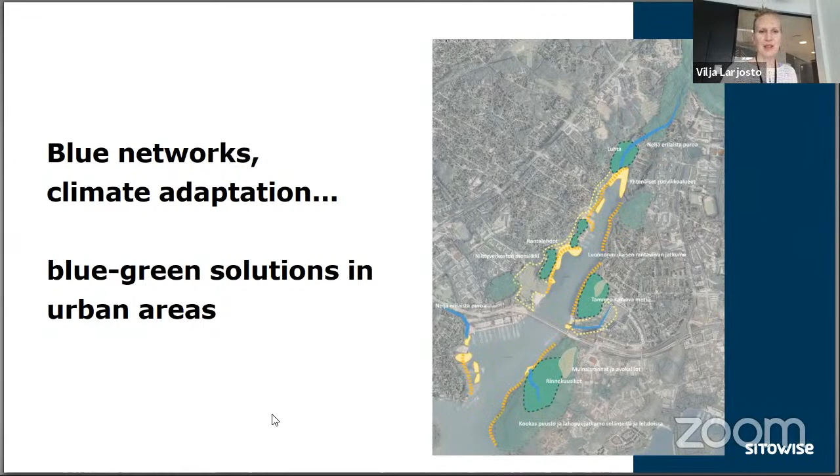In a number of projects that I've been working on in the 2 recent years in Finland, today I will talk about a river in Espoo, which is part of the Helsinki metropolitan region. You can see on the right-hand side, it's a river that flows in a very urban setting with habitation around it, as well as industrial areas.

And its mouth here, the delta so-called, it comes to a small marina area, and there is also a lot of reeds growing there.

And this is actually what is happening more and more. Very often the river flows here under this road and continues towards an industrial area and fields there.

But you see this almost yearly now that these flood events are happening and they are actually cutting the streets. Very common phenomenon for European cities, and I think Finland has been spared mostly from this kind of extreme events until now. But I've been working on 2 projects that are not yet concluded or constructed.

So I've been involved in the reconstruction of this street design here because we want to raise it a bit higher in order to avoid the flood events. But of course that doesn't actually solve anything for the floods, it just floods less frequently when it's higher.

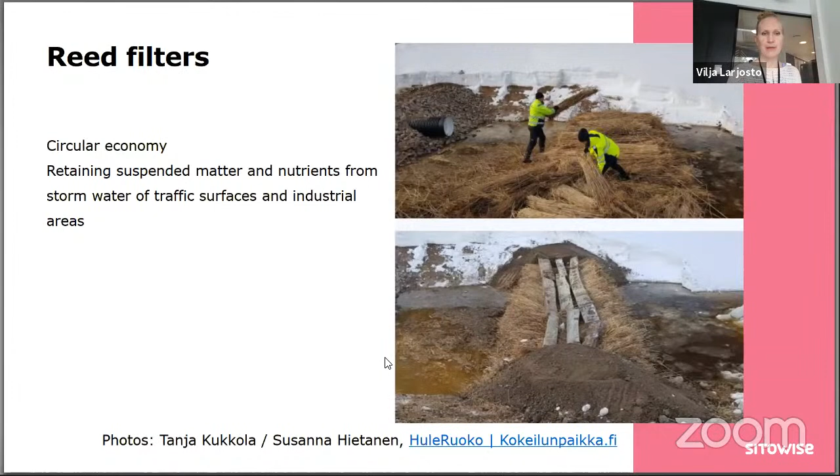I'm seeing a message in the chat. Is there? Okay, there's just Anna's message too. You can ask questions.

The third solution or approach we are using in this project is in connection with the road or street design. You can see the flooding street I showed here. There, the most important function for these bioswales is not to control the volume or quantity of water, but the quality of stormwater before it flows into the stream.

So what we are applying here is this idea of bioswales on both sides of the streets. The idea is to help absorb or filter nitrogen, dissolved metals, and phosphorus, so that it wouldn't go into the stream.

But at the same time, we wanted to take this further by introducing dynamic vegetation to these swales, because we're also working with the image of vegetation in the street, as opposed to traditional or business-as-usual urban streets where you have grass or lawn and some bushes and trees. Here we are working more with meadows, taller grass vegetation.

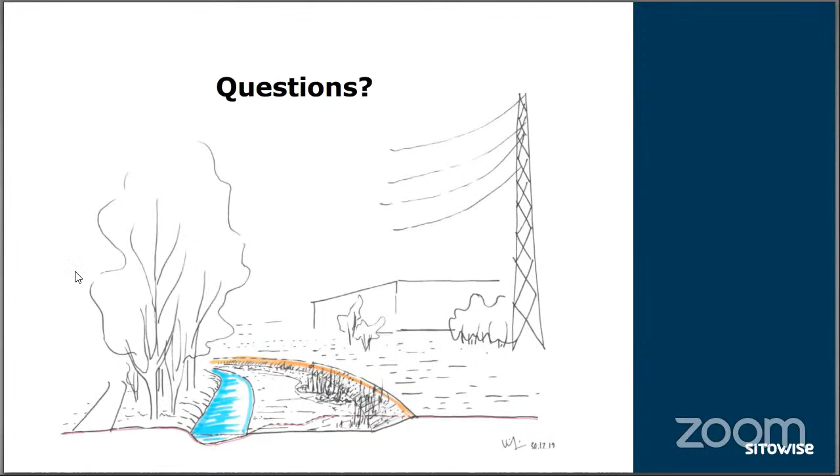There's a question here by Alex asking: can you name some examples of plants that are useful for bioswales in Finland?

I will go back to the slide with the plant pictures. I'm not the plant expert, and I have the planting list, but we don't know yet for sure if these are the suitable plants - we suppose that they are. We looked actually very much at natural plants, these kind of modest plants. These are the different plants, but I don't know their scientific names, so I don't know if it's helpful to start naming plants in Finnish, and each site has its own characteristics. But we tried to add species because our expert on dynamic vegetation also knows a lot about butterfly plants, etc. They knew how to pick a bit more rare species and native species for the selection, so we can not only find plants that survive there, but also support maintaining more rare native species if they are available and can be found.

Thank you, and there's another question - a few more actually, now I got them. How do you determine the positioning of the meadows, where it starts and where it ends? I guess the measurement is the key question here. Yeah, how do we measure?

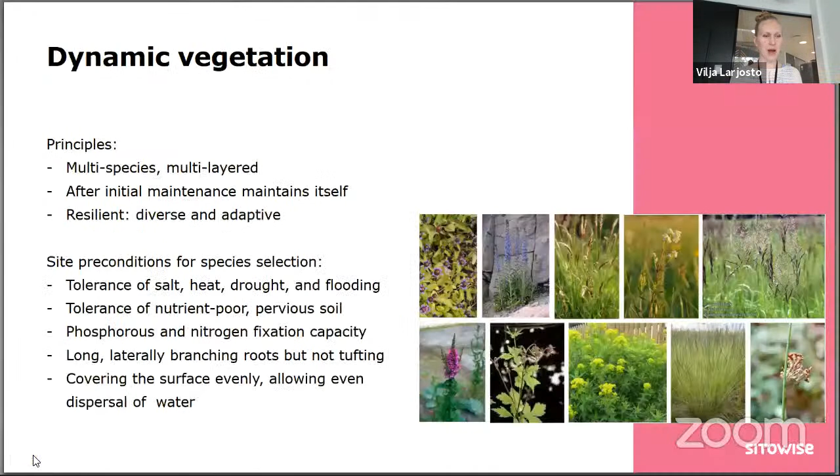I don't have our design map here, but if I understood the question correctly, I'm just skipping back to this slide. We have a map, the design site plan of the whole drawing, and these areas are actually quite well defined. We looked at the mean water levels and the high water level, so the size of the meadows comes from the hydraulic modeling, from the modeling of different flood frequencies - how much more or less volume and capacity we should need. Then together with the water experts, we made these shapes where the slopes are always about 1 to 3, because of maintenance - the maintenance is done by machines, and this is a recommendation.

So we have this slope, and then the adjacent surface shown here in this section, adjacent to the main water body, the main stream. But here, as I said, this other one is separate, but it also has the 1 to 3 slopes, and there's a certain size calculated for it. About the meadow: below the mean water level, we are not planting anything. Above the mean water level, we have direct sowing of a certain mix of meadow seeds - this is anticipated to be the humid, wetland-type meadow. Then from above the high water level, we propose planting a different seed mixture.

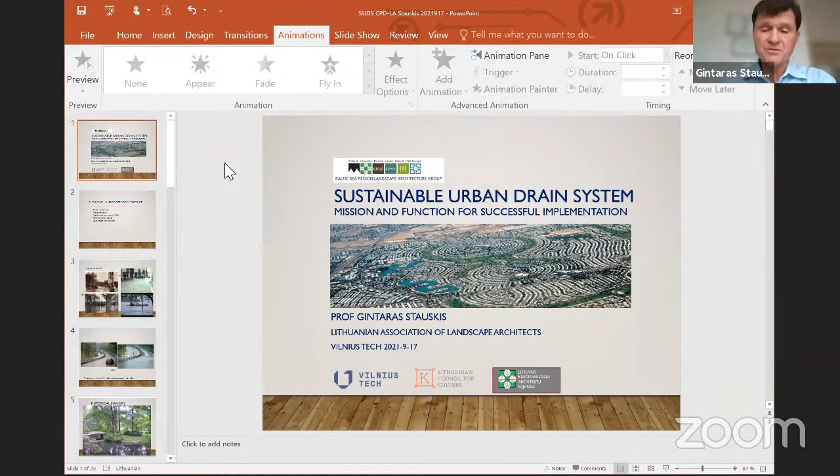So I will touch on several aspects. I will mention recent challenges - even though they are known, we can look at them again. I will mention the experience from the past, how this was managed then - it's very interesting to see that. Then I will focus on the mission and functions of the sustainable urban drain system, and look at a couple of projects: a retention pond project, and a case design with calculation of volumes in one single family house project.

We have had floods forever, but only recently have we become so sensitive to them. When floods happen in the countryside, they are absorbed and taken naturally. But when that happens on the main street in the city, it's a big adventure, and people take pictures and put them online, admiring what is happening. Each time we have this flood, we have headlines in our newspapers and on the internet saying municipalities don't take care of the rain sewage systems and don't care about the infrastructure in the city.

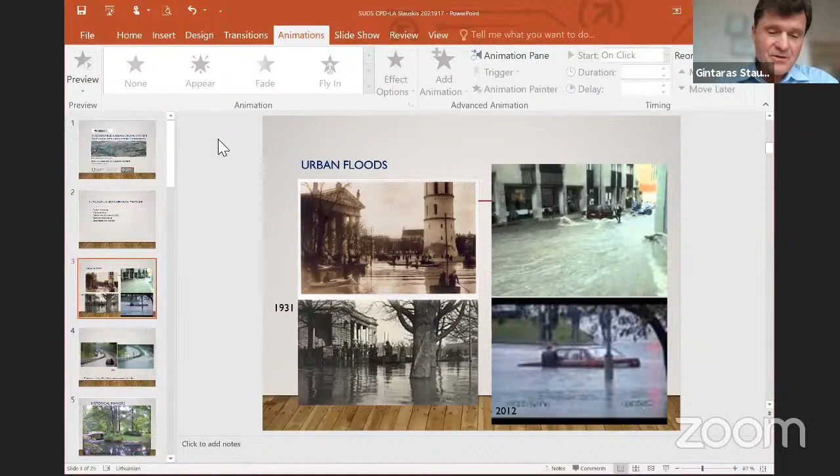So maybe the mayor has to look again and again at that. You can see similar pictures from the 30s and 40s in the 20th century, and similar pictures we have today.

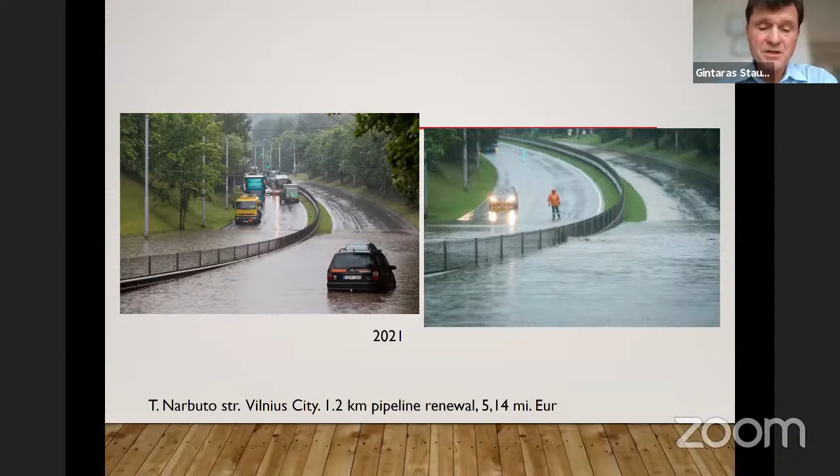Thank you, Gintaras. We have had some extremely dangerous places in the city, and after all, there was a big investment done reconstructing. As you see, a 1.2 kilometer pipeline renewal cost 5 million euros to the city. This was a low area on a motorway in the city that was flooded after every more dramatic rain. So as we see, it's very costly to make these mistakes, and it requires a big investment and big costs for the city, which means also for all the residents.

It's very interesting to observe how water was used in historic manors. We see that probably the swampy areas, wetlands and wet places were the places of primary selection for these historical manors, because modeling these ponds was the major attraction in historic manors.

What we see in Vilnius city is that we also had a historic tradition of how these rainstorms were managed in old times, when we did not possess high industries and abundant finances, and even when they were sometimes very limited.

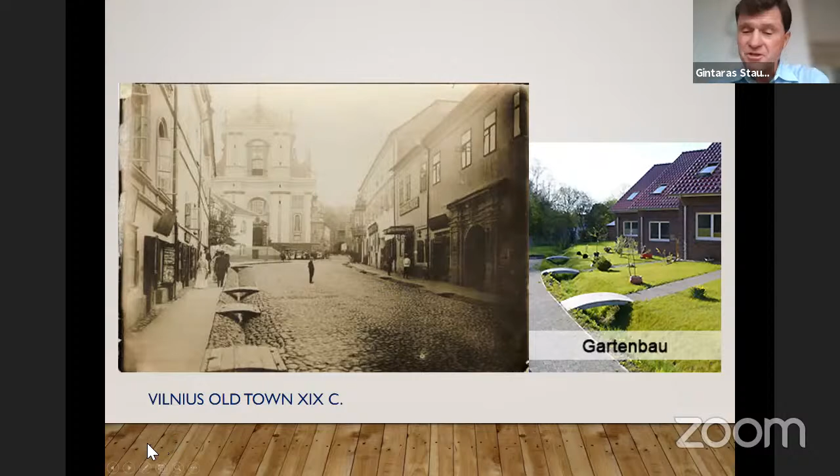There's an interesting picture of the old town Vilnius - you can probably recognize the street, it's Aušros Vartų street - showing how rainwater was managed with a slight curve on the side of the street. I also have a picture from one German company advertising exactly the same solution for residential areas nowadays. It looks very similar to me.

So if we look at the mission of the sustainable urban drainage system, what is it used for and what can it do for us? Firstly, we have to manage runoff quantity and quality.

The quantities of runoff water have become a major issue for urban areas, because they have a very short duration and a very high amount. This is very difficult to manage in traditional ways, when we dispose of rainwater underground into the rainwater sewage pipeline. Also, rainwater quality is an issue, because when the rain flows through urban areas, it carries all the dust, oils, and other harmful particles with it.

The other important thing is biodiversity. We know that when there is no water, there is no life. Water is one of the preconditions for plants, and consequently for species, for different fauna and other forms of life in the area. So if we want more diversity, we should resolve the question of watering.

It's sometimes very strange to see that firstly we are draining the water and then we are watering the areas. And of course, last but not least, sustainable urban drainage allows us to create better places for nature, because of higher biodiversity, and better places for people. When these places are more attractive, they don't have a heat island effect and other problems.

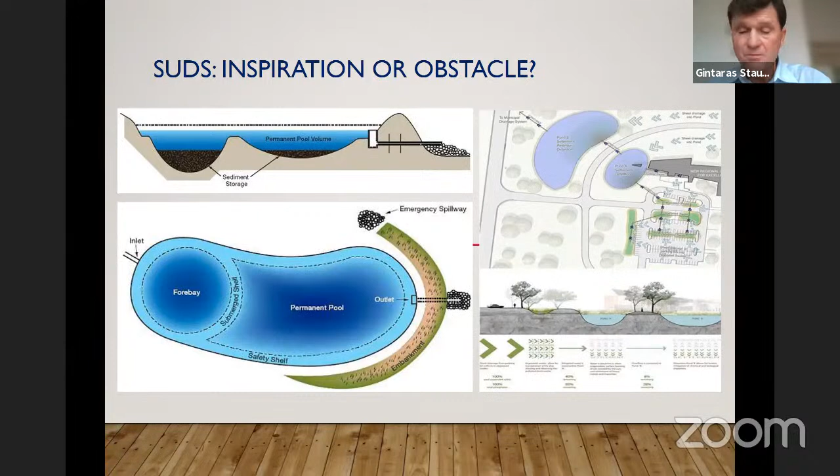Sustainable urban drainage is also part of a sustainability pathway. In different sustainability assessment systems internationally and in different regions of the world, these issues are ranked very highly, affecting up to a third of the total sustainability assessment of a building. These aspects address site reuse, regulating and water flow, management, selecting local species of plants, watering the plants, and monitoring the whole process.

Water is also a very important resource system in the city. It's a natural resource that has certain subsystems: streams, rivers, lakes, embankments, and groundwater aquifers. It's also an infrastructure subsystem, with systems built by people, such as channels, wells, dams, and purifying equipment.

Water also addresses the socioeconomic needs of people, because it is an important part of human life and human activities. We know that places that have water are very attractive, and people very often visit them. On the contrary, dry places are not so attractive.

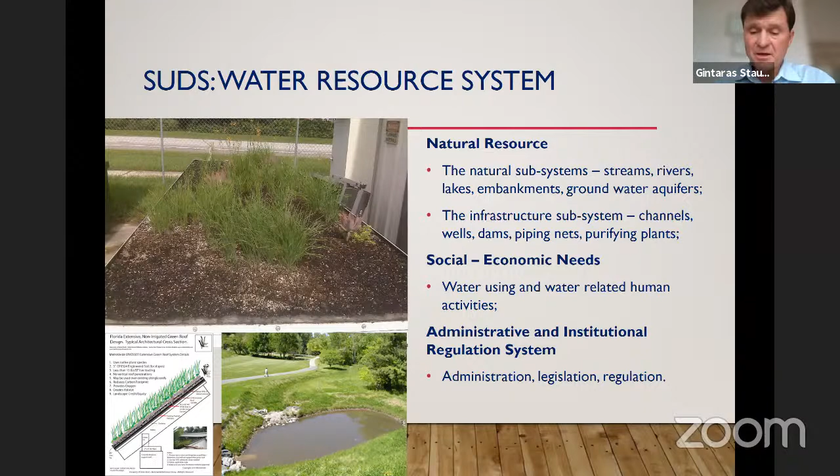We also need some regulatory system for the way water is used and disposed of. Using water is still maybe not a very big challenge in Lithuania, for example—we get most of our drinking water in cities from deep underground water bores—but many countries and cities now already experience water scarcity.

Sustainable urban drainage can resolve different functions. Firstly, it is a big subsistence system for local communities, meaning drinking water and using it for irrigation and fishing. It's also used by industry for commercial use, for hydropower plants and other equipment.

It's also for environmental regulation, and non-consumptive use of water is very important when we have to purify it, use it for recreation and tourism and public space, and also for composing landscapes. The ecological value of water is another important point, and it lets us create gene pools and nature conservation solutions.

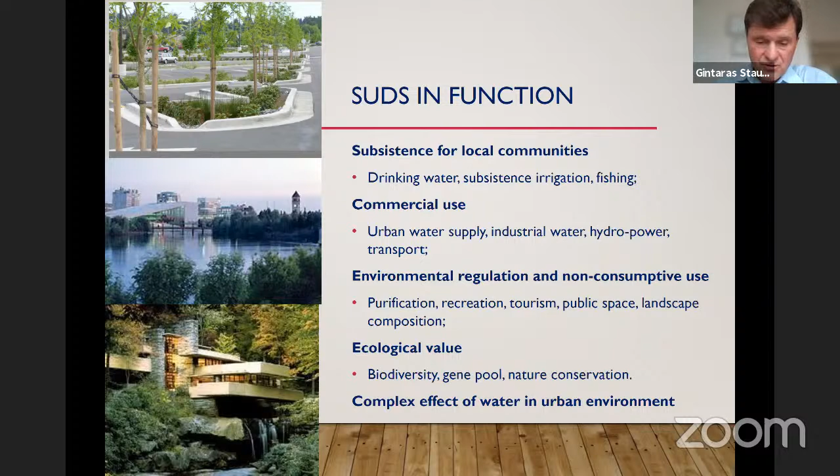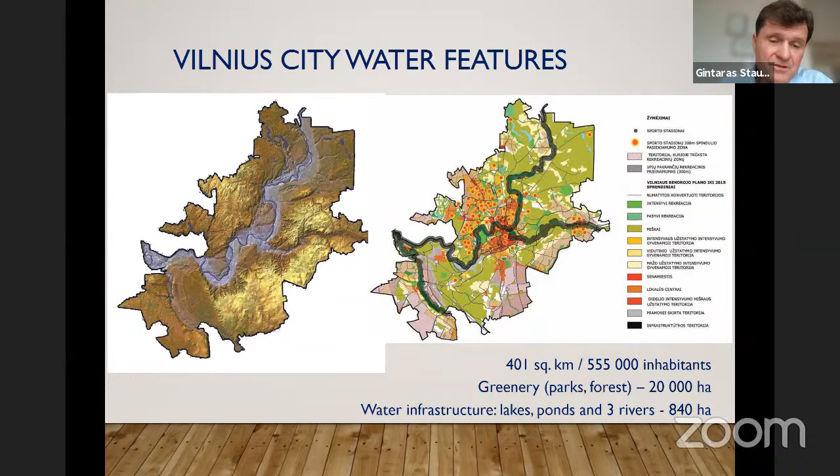We have another interesting project in Gulbinai. Gulbinai is an area adjacent to Vilnius city, pretty close to the city.

Owners and investors in this project ran into problems when they tried to resolve rainwater management in a conventional way—pumping it through underground pipes to the central purification station. The area was very large and had a double inclination: the western side sloped west, and the eastern side sloped east. So the infrastructure needed to manage this artificially became very costly, which almost undermined the whole project.

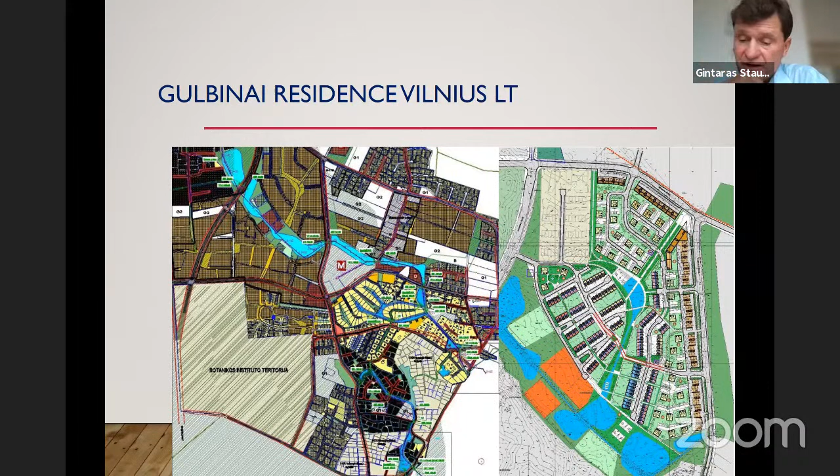Very often on weekends, people drive to a lake or pond for leisure time, but instead they can have this just across their front door, very close to their living place. So after huge changes in the project and looking for new solutions, they created a very attractive project and business proposal for the real estate market. These are some pictures of how this is expected to look in the near future.

We have some projects and attempts in Vilnius city to cope with rainwater. One project was designed in a place that was frequently flooded, with hardly any other means to cope with it. So the Vilnius city enterprise responsible for caring for the city developed a retention pond project, and first they identified the area from which they would manage the rainwater.

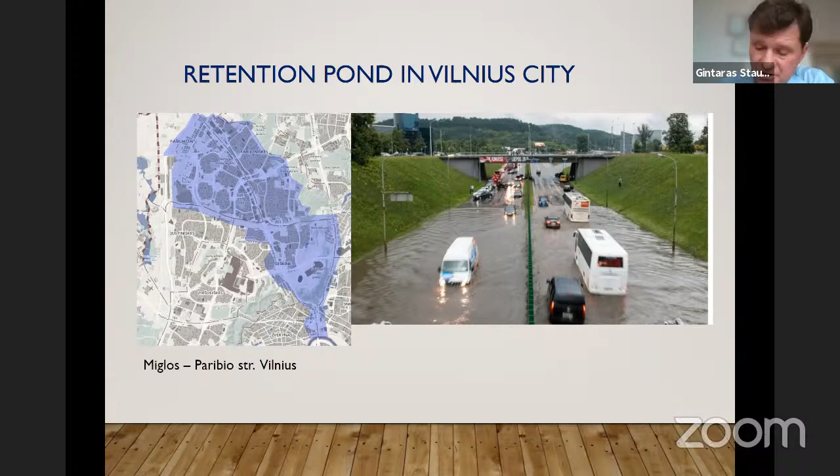You see it on the left-hand side map. In this map you can see the power of water, which we all know very well—it's very strong and can shovel all the lids off underground pipes like a toy, becoming quite dangerous for people. So the place for this retention pond was chosen in a hilly area.

You see the purple line—it's a disposal line where rainwater runs down through the pipe. Then midway, they planned a pond that could hold water for a certain time when the rain is very heavy. They retain the water for a certain time, then slowly absorb and dispose of it.

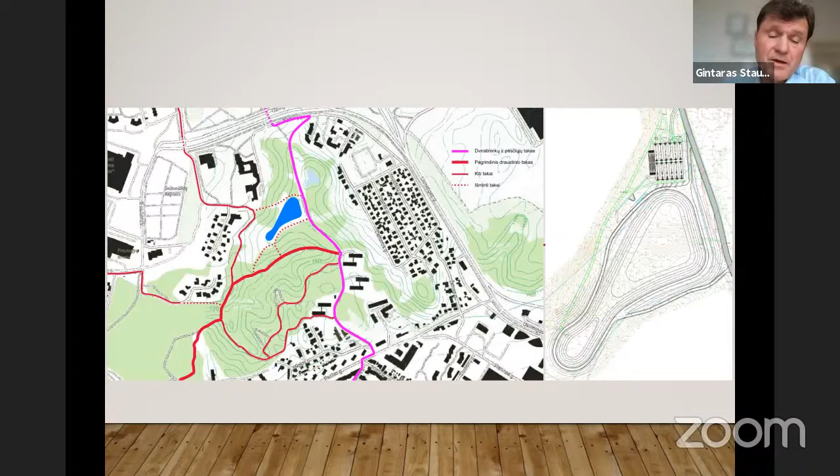I'd like to show an experiment with what seems like a simple situation: managing rainwater in a single family house plot. It's not just about nice design, but about knowing the real quantities and how we cope with that. So I took an ordinary private housing site. As you see, there is a house, a parking area paved with hard pavement, and some green space.

First I took the conventional materials usually used by people who don't care about sustainable urban drainage. Then the other option introduced different materials, and I calculated how the whole thing looks and what balance we have.

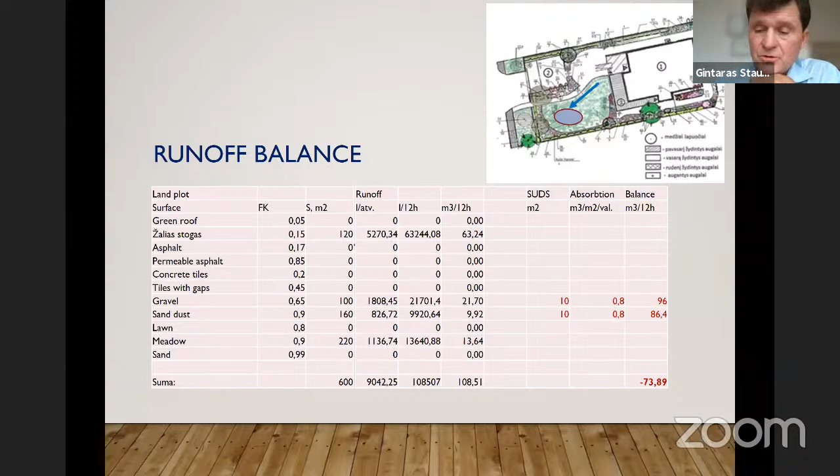Option B included a swale on the site, and option C included a retention pond. Finally, when I introduced both elements, the first case with a conventional solution resulted in 228 cubic meters in 12 hours from one single family house plot. You can imagine the quantities we might have with 10 or 20 plots like this.

The other option was just changing the material, not introducing any new elements, just using more water permeable materials like gravel instead of asphalt, or permeable asphalt instead of conventional asphalt, and using meadow instead of a cultural lawn. The third option was introducing a swale and a retention pond.

So you can see that even a simple change of materials reduces the runoff dramatically, and introducing additional water management elements like a swale and retention pond even makes it less than zero. This means that all the water is absorbed on site.

Some solutions are indeed very simple, and we can just admire why we don't install them, why don't we do them. As you see, making a simple cut in a curb and elevating the driving way instead of the green part of the site allows us to dispose rainwater on these little clutches of ground where it could successfully water the plants and be absorbed by the land.

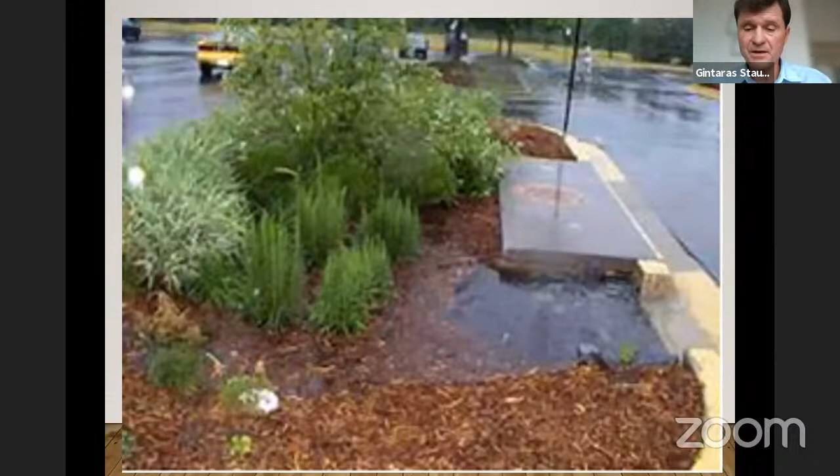Another very simple situation is when we have a parking area designed under the residential block. We have runoff water anyway, from the roof and from the parking site. We can easily dispose it to the side. Of course the trees are very young and new here, but you can see that probably in 3 or 5 years this will be a sort of very attractive and green space. So instead of having a problem, we can have very nice places.

Of course, we have to manage and kill the stream of the running water, because it could be very erosive and dangerous, also eroding the areas. So stones, natural stones, cut stones, or natural round stones are very good for that.

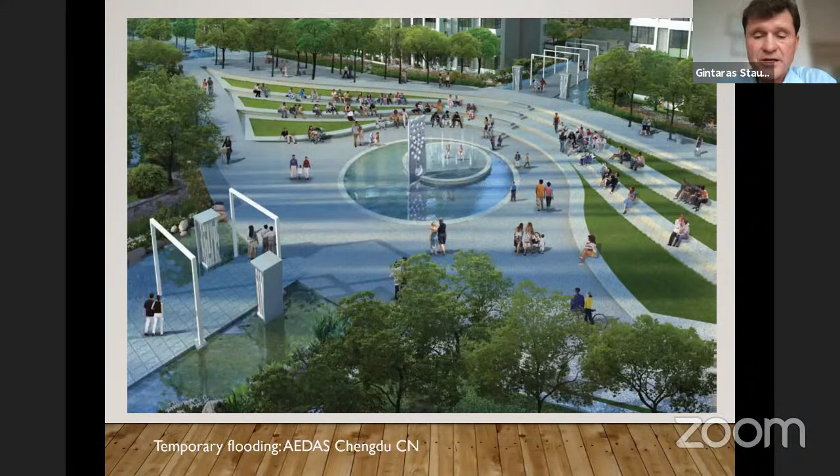There are interesting projects created in China by AEDAS company, where the public space is planned so it could be adjusted for temporary flooding. You can see that the middle of this public space could be temporarily flooded for several hours, and at that time people could be away, or sit on the sides, on the terraces, while the water is absorbed but naturally goes into the ground.

So I have several conclusions. We can see that SUDS is not just a technology, but it also gives multiple functions and meets public needs. Good solutions should be planned because they should be connected. It opens for us the possibility to use local materials and local plants. And of course, it's very good to talk and share our experience to see what is happening in different countries.

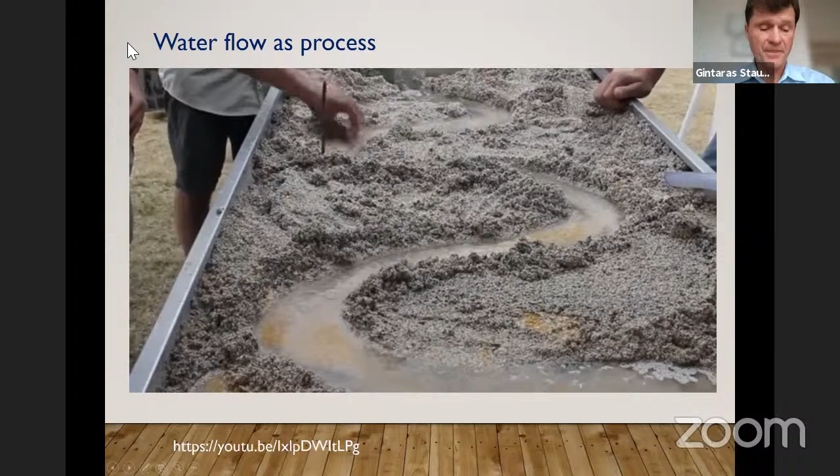So for the end, I have a final comment that we should see water as a process, as a moving thing. And I will share now with you another short movie. Let me do that to see how water is changing and how it is flowing through the area. One moment.

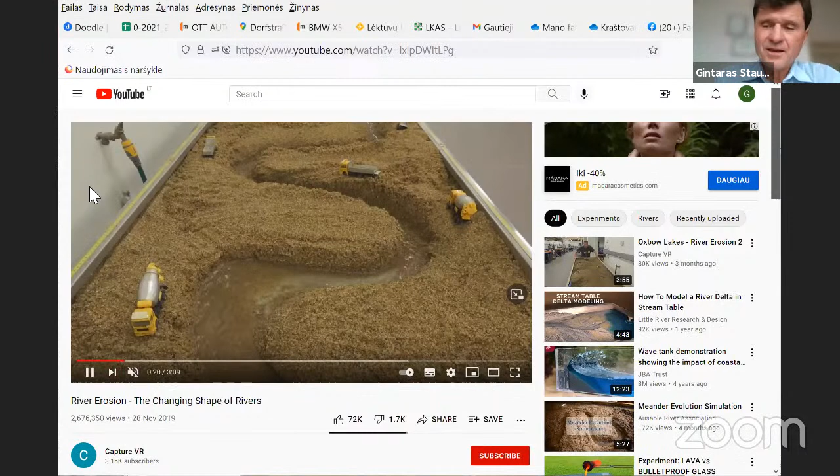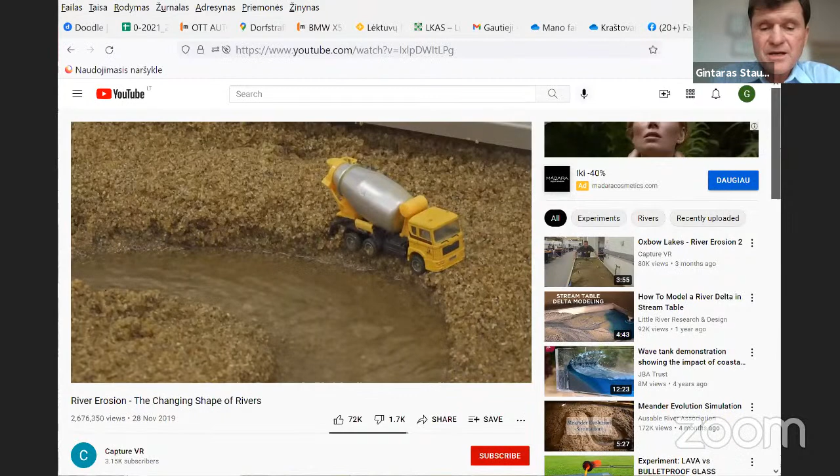Interesting model of what the water stream is doing when it's flowing and when it's running. There are certain principles of hydrodynamics, and we should know what can happen when we design swales and streams. Water has a huge power — it could break the shores and carry the pavements away. So this requires a bit of understanding of the whole hydrodynamic processes.

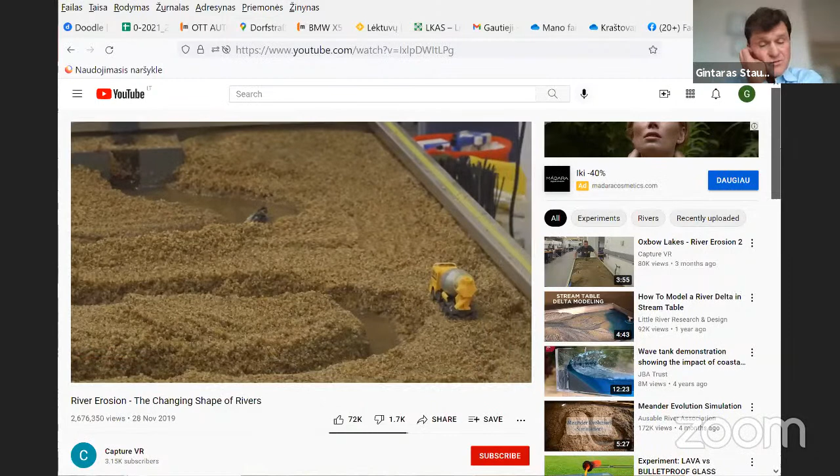It's very interesting — just follow this movie, which I think was modeled by students with their teachers, and you can see how the water stream is changing its line.

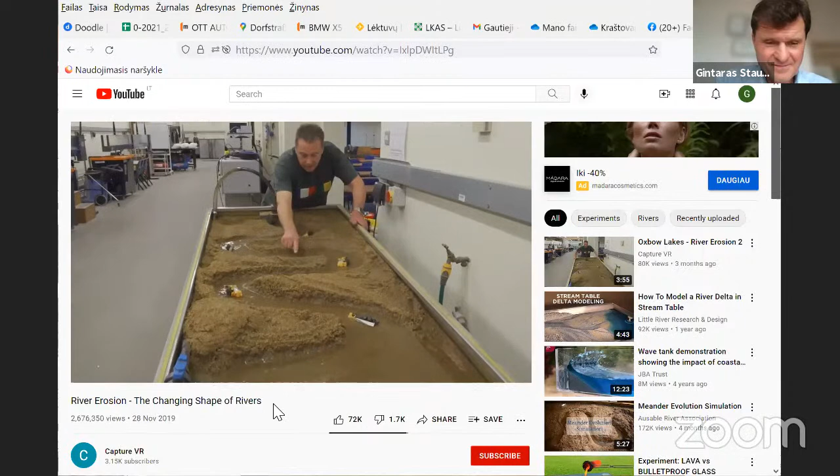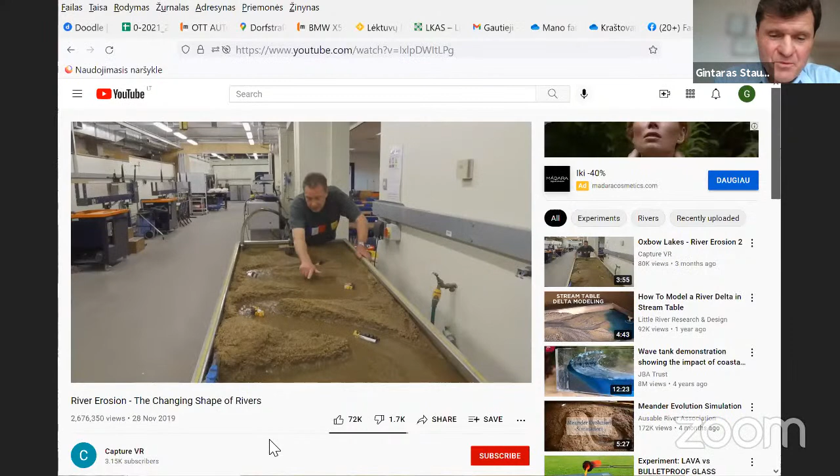You see that certain parts of the perimeter of the stream are disappearing under the water. Of course, this is much faster here than in nature — it happens more slowly there, but the processes are very similar, and certain parts of land appear to be under the water.

When there is an obstacle in the water, the water goes around it and erodes additional perimeters.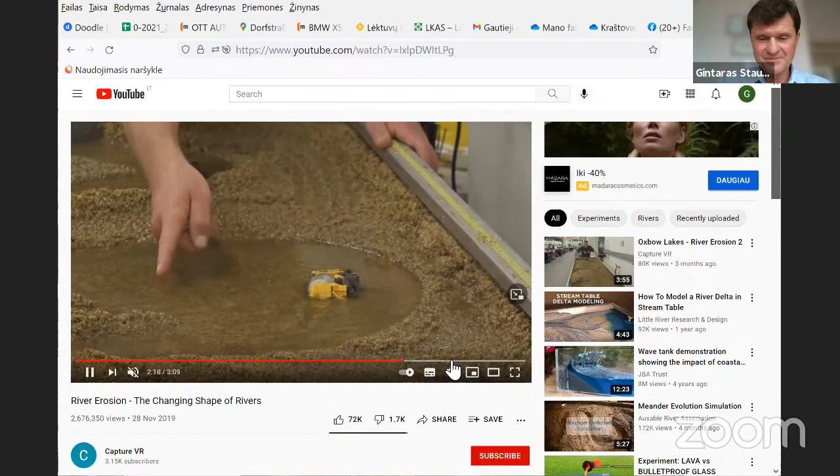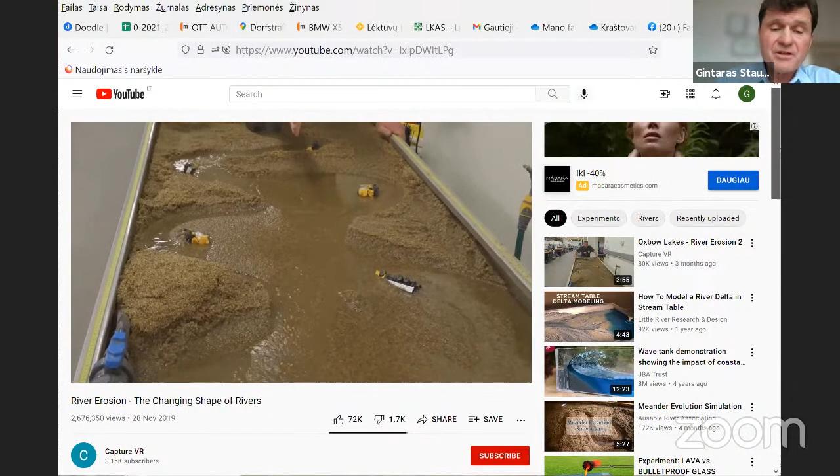We have had a similar situation in Vilnius city with the Neris River, when it had a round curve several hundred years ago, and then the river cut straight after eroding its bank. Now we have the old, ancient riverbed area with remnants of the river flow, so we have some ponds in this area, and it's very attractive for green spaces. But sometimes you have big pressure from businesses who want to develop this area, so it's an additional challenge for city planning when we have to keep our wetlands and our treasures.

Thank you. Thank you, Gintaras.

Shifting river landscapes are more resilient than the ones that are stable. There's a nice landscape architecture book about the Mississippi River's shifting landscape that I can recommend. Now we have a few minutes for questions for Gintaras' presentation.

There was one question already in the chat room, I'm not sure if it was already answered. I think it concerned the single family house example you gave us, Gintaras. What was the third version? The first version was a conventional design without paying attention to water permeability or water management. The second version changed the materials to be more water permeable. And the third version included installing a swale and a retention pond.

I'm interested to hear, you talked a lot about Vilnius and different urban systems, but what's not clear to me is how much of your city still has mixed sewage and stormwater systems, or do you have them separate already? I guess in the old city you still have mixed systems, that's very common in European old cities, but is it a new trend to build separate drainage for stormwater? The regulation requires that it shouldn't be mixed, there should be separate systems, but sometimes in the old town there's no way to add additional rainwater sewage, so small quantities are allowed to be in a mixed flow. We still have this.

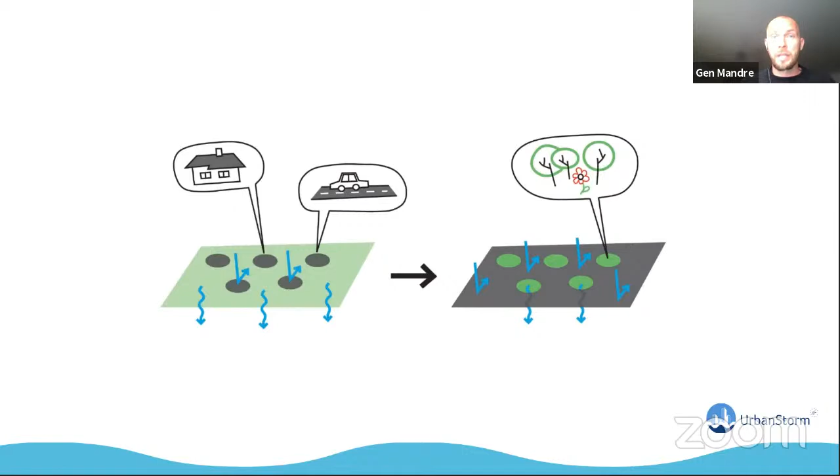The biggest problems in promoting I have faced are mainly old habits. It is very easy to do everything as we are used to, but with a growing and more dense urban environment, we have to change our ways. Lack of awareness, of course, and fear of testing new solutions. What if something goes wrong? Who's going to take the responsibility?

But with bold decisions and adapting sustainable drainage systems, we get a pleasant living environment. Everybody likes to live in nice and social areas, so that raises the prices of the real estate in that area where the solutions have been adapted. And in a nice living area, people find more activities and spend more time outside. Plus, examples have shown that greener and more social areas bring down criminal activity.

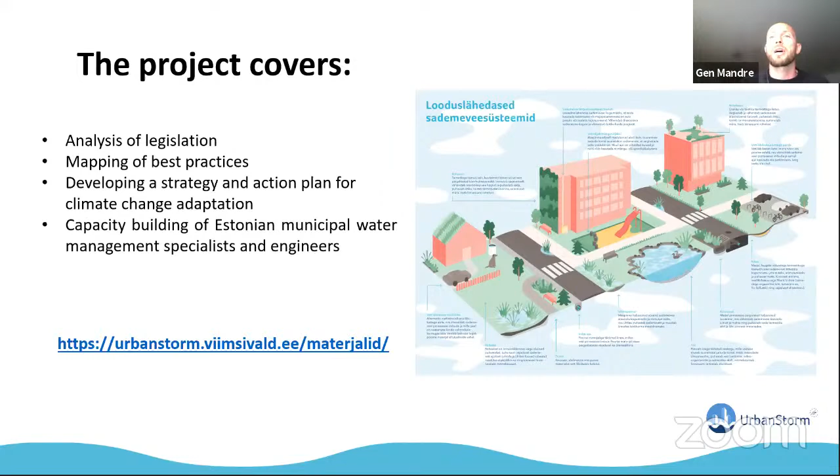So far, there is a report on legislation and standards, a financial model of stormwater fees for municipalities, a strategy and action plan for climate change adaptation for Tallinn, our capital, and Viimsi, the municipality where the test sites are. And 4 two-day training sessions for altogether 60 to 80 persons on stormwater management systems will take place very soon.

Now shortly about the test sites - most exciting part, at least to me. About 15 hectares of land have improved resilience to flooding as a result of the development of Viimsi sustainable drainage solutions in 2 pilot areas: Viimsi Manor Park and Randvere Street parking lot. Thanks to that, we can already tell that the number of stormwater emergencies decreased in Viimsi quite a bit.

And now shortly about the test sites. The aim of the Manor Park test area was to use different measures in order to reduce the speed of water runoff and create areas for detention and retention. 6 different measures were used. Also, the existing ditch was cleaned and bushes were cut down. The old existing ditch was made wider and different species of plants were planted.

So shortly about all those 6 different techniques that were used. When you see the plan at the left upper corner, the water enters the ditch, and right away stormwater enters where the stormwater enters the ditch. As the arrows show on the map, stepping stones are placed first in order to reduce water speed. The stones also help to enrich the water with oxygen, and larger stones create a path for moving across the ditch.

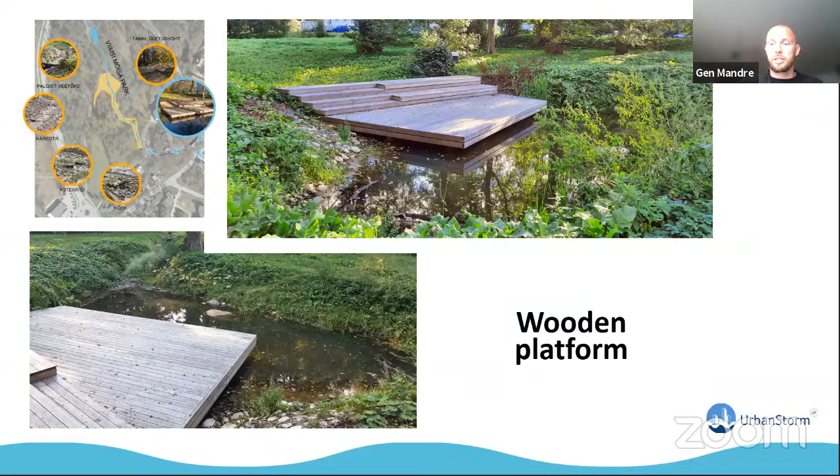Different crossings will definitely make the ditch more playful and exciting. The dam expands the water level around the platform, and at the same time offers the opportunity to sit on the platform from both sides of the ditch. Adapting rainwater solutions to the park also brought more visitors and made it more popular, which was one of the goals of the design as well.

The second test site is Randvere street parking lot. There is a huge demand for parking spaces in Haabneeme. From a stormwater perspective, a parking lot is a problem - basically a large non-permeable surface. And this is exactly why we built one parking lot.

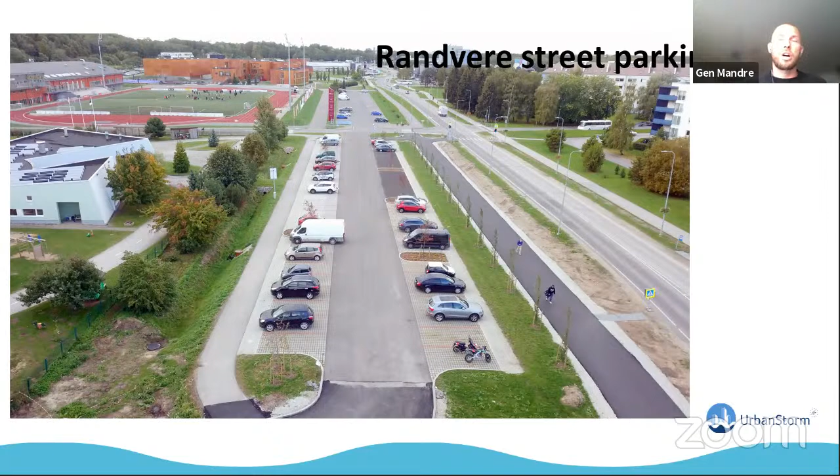I would say parking lots are one of the main hard covers in the city scale. Over there, 3 different surface covers were tested: drainage asphalt, paving stone with gaps between, and grass stone. Each material has its own drainage system underneath, so they are separated from each other, as you see on the bigger plan from the top view. Each has a different drainage system underneath to measure how fast and how much water infiltrates through those materials. The driving area in the middle of the parking lot is made from asphalt.

Asphalt is made of reused plastic. Over time, we gather data about how different surface covers work and where they should be used in our climate. The data is collected - you see 3 wells here, here, and here. Each well is for each material, and in the well there is a data collecting system which gives us all the information.

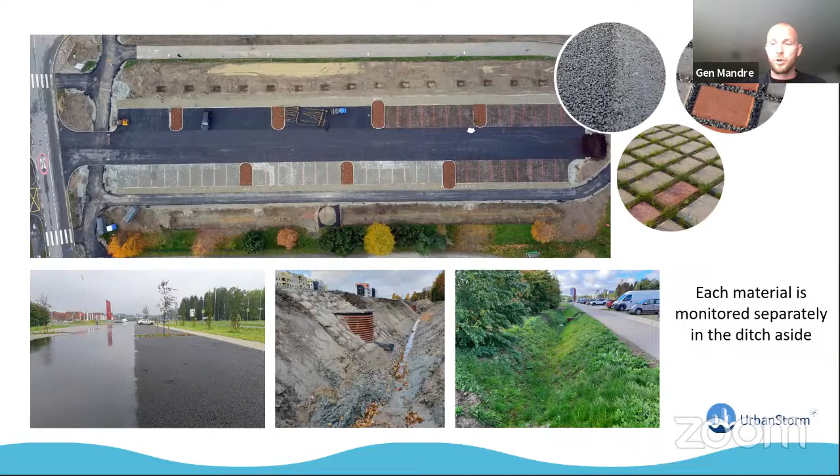I think it's very important to share that information. Information boards have been installed at the test areas, which give people knowledge about what makes the area special and what to draw attention to. Thanks to the information boards and articles published in the local newspaper, we will increase the number of residents of Viimsi municipality who are considering alternatives to the usual stormwater management solutions on their plot as well.

Shortly, in 5 years' time, we hope to increase people's awareness and interest towards these solutions, and hope to see more similar sites built to make our cities sustainable and climate resilient.

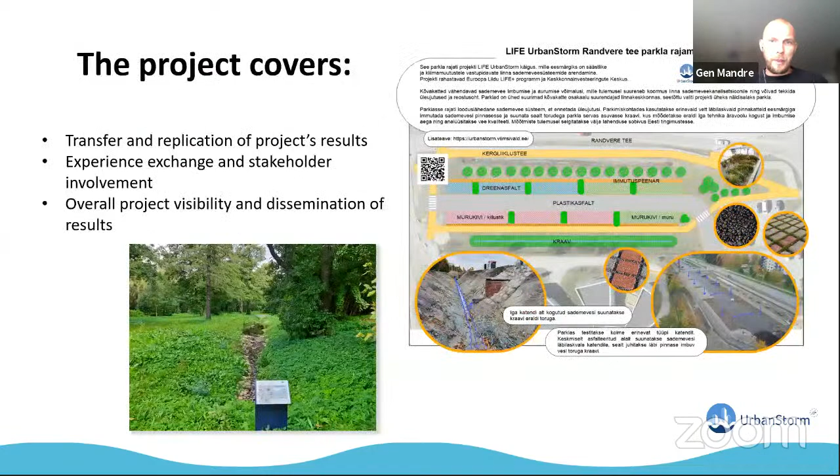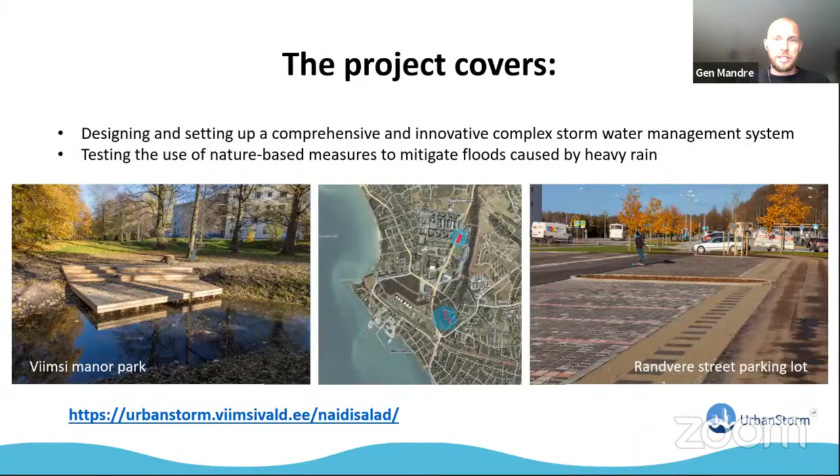For example, myself, I'm a landscape architect, then universities. When I go back to the partners, which is in the beginning - we have public partners from municipalities. We have a partner from roughly Tallinn city, then municipality of Viimsi, University of Life Sciences, and Baltic Environmental Forum Estonia. So it's very Estonian centered, but all the partners have connections everywhere else abroad, and I think through that all the information will spread.

Okay, and we have one question in chat about the impact, and the question is, do you measure the water quality from the parking area? And I would ask also, are you going to measure the financial benefit of this activity?

Good news, I can already tell you a little bit about the price of construction. In case of that certain parking lot, the construction cost is basically the same as constructing a regular parking area. And I think what may change the cost would be plants - if you use a lot of plants, then it will raise the price of the solution.

About measuring the water quality, yes, we are doing it. It's one of the issues at the moment. All the materials are separated with - I don't know how to call it in English - the membrane, which doesn't let the water through to infiltrate into the ground. So there is no danger that if the water is really polluted, it will end up in the groundwater or something like that. But yeah, we are doing it, and at the moment I don't know what the results are, but in a year I'm quite sure we will have some answers.

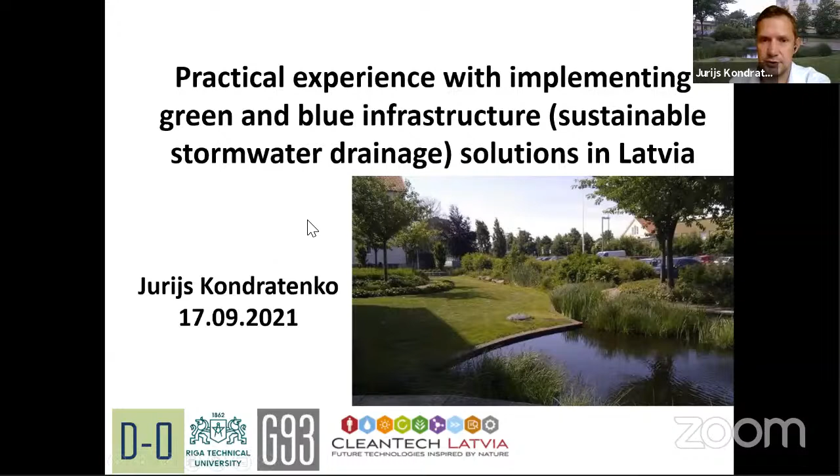So basically, a bit of an introduction of how we view green infrastructure and sustainable urban drainage. If I have to say the two key words, those are: one, multifunctional infrastructure, and two, stormwater not as a problem but as an opportunity - or as we say in Latvian, not nevis defects but effects. So how to turn this problem into a solution, or a problem into a resource, right?

So what we really practice, and where we see the most potential actually in Latvia, is the combination with green infrastructure, because a lot of our systems, storm sewer systems or combined sewer systems, are outdated and with limited capacity. And green infrastructure comes in very handy, of course, where we have space. Where we don't have space, probably we have a hard time implementing green infrastructure, except for green roofs or infiltration solutions where groundwater level allows us to do so. Also for Latvia, it's let's say it's both challenge and opportunity.

We are the only country around the Baltic Sea region where, as a rule, there are no tariffs or fees for stormwater management. Only in combined sewer systems do we have to pay this fee. On one hand, it's a problem because municipalities don't have much money for investing into stormwater management. On the other hand, it gives an opportunity because we have to deal with the systems we have at hand, so we have to improvise with a lot of decentralized solutions.

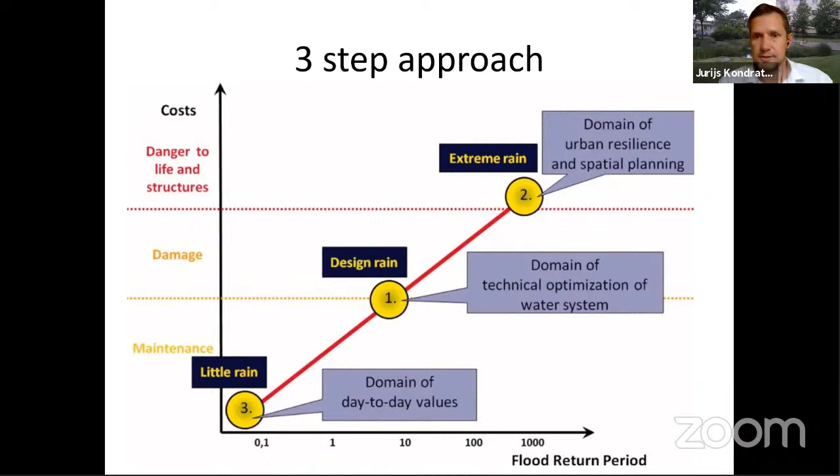So will we have enough water for our stormwater solutions? Will our stormwater solutions be effective in treatment of this water? We're trying to look at all those aspects when we design the green and blue infrastructure techniques or SUDS.

I'm going to mention 6 groups of projects. The projects I'll talk about are not exhaustive -- there are quite more, but we could speak about each of them for half a day, so I'll be speaking very briefly.

Of course we have this traditional sort of green infrastructure that people around, especially in Estonia and Lithuania, are familiar with, and certainly Finland, Sweden and Poland as well. These are green infrastructure traditional from the conventional times.

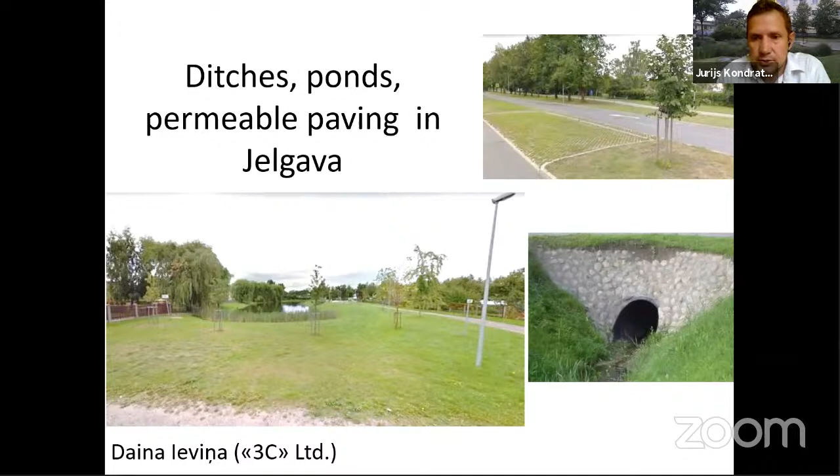Ponds and ditches and green parking lots, and also what can be called a stormwater park -- a park built around a blue and green corridor in Jelgava city.

Now a so-called dry river project in Rūjiena, just across the border from Estonia, one of the northern towns in Latvia, where many Estonians come to shop for alcohol too. So if you come, please visit the site -- you'll have two reasons to visit this city.

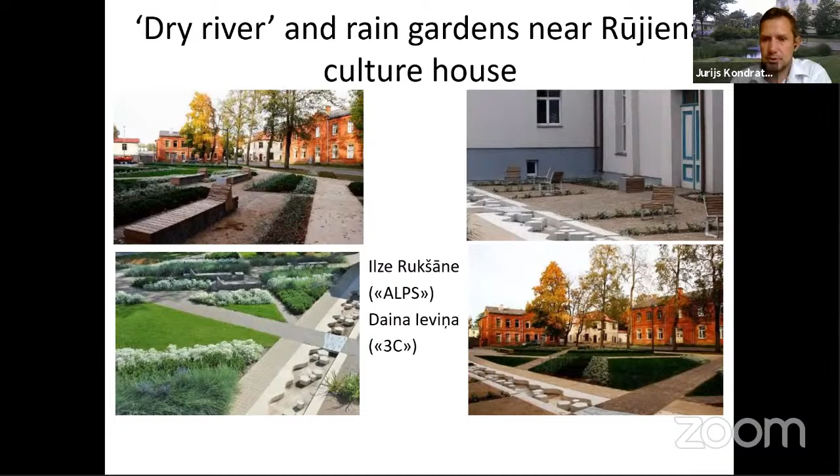A good thing about this, which I haven't mentioned when I talked about multifunctionality, is actually the landscape aspect and the public space aspect. We can really benefit from this, and it's a good example of how it's done in a public space setting.

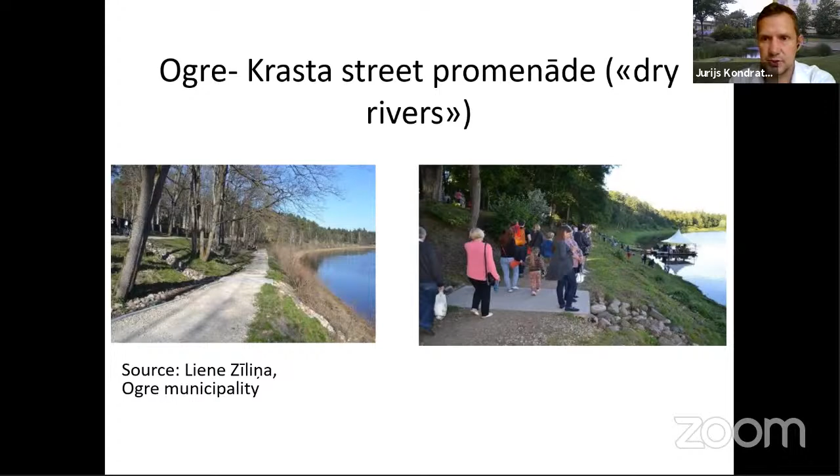The same Rūjiena town has, not so visible but effective, infiltration solutions -- French drains have been implemented. This is not so much for infiltration, but more for filtration and runoff management -- so-called dry rivers in Ogre town, as well as rain gardens.

A very interesting project, one of the flagship projects we can now show in Riga, is a rain garden, or biofiltration bioswale, in a major shopping center parking lot. It's a big parking lot, and it was implemented quite some time ago -- this was the first wet season when it operated.

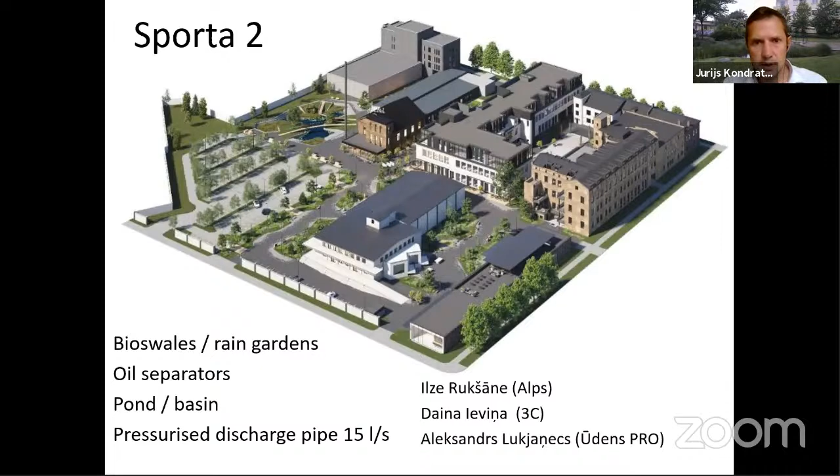So you see some visualizations here, and you see quite some capacity for storage and discharge.

So basically, well, the reason it's not being built is just that the site has changed owner. It's not because the concept hasn't worked, it's just because of the ownership issue. So maybe it will be implemented, we don't know.

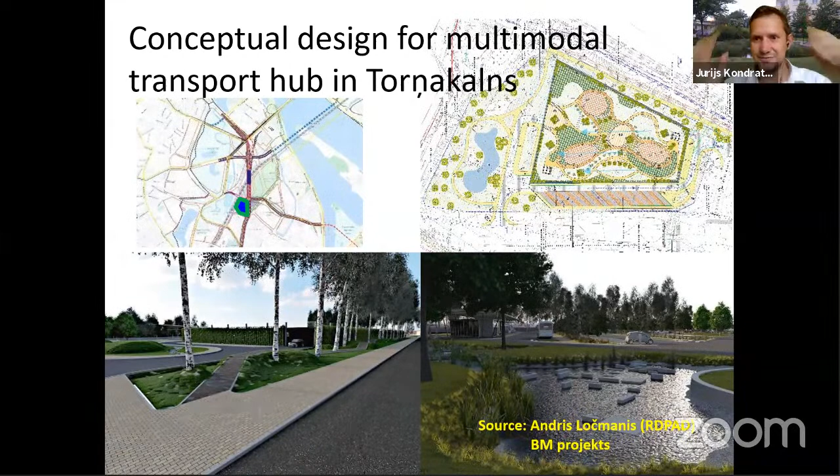Okay, there are some conceptual designs for public spaces as well. I'm not sure if this one is going to be implemented, but it's just to show the direction of our thinking - by our, I mean our collective Latvian community of engineers and landscape architects.

And one of the big projects, the biggest project, keeping fingers crossed it will work out - actually this is the project we started out together with Ken 10 years ago. It started as a feasibility study within this Latvian-Estonian cooperation project, and now it's being built.

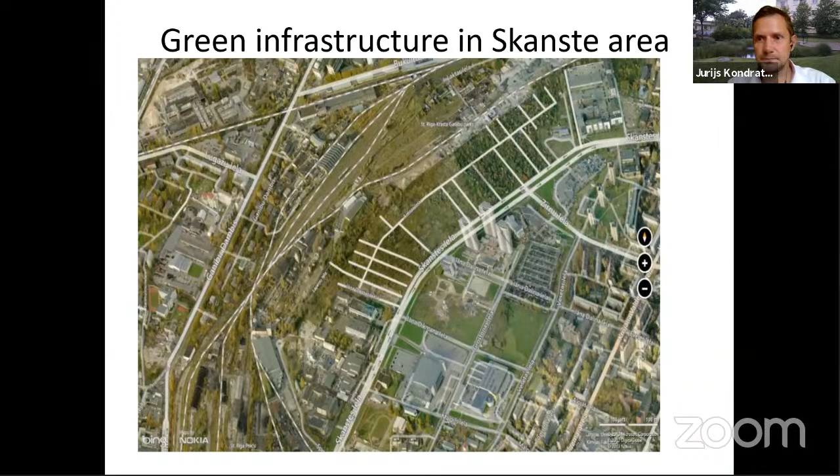This is the area not far from the historical center of the city, the former cargo railway yard. It's been developed quite rapidly, and the problem there is that it's a low-lying area, and the storm water has to be pumped with 2 pumping stations.

So in order to do the drainage in a conventional way, the city would have had to rebuild 2 pumping stations, pressurized sewers, as well as build very expensive sewers here, because the ground conditions are not very favorable. So instead, there was an idea to come up with natural drainage, or naturally resembling drainage.

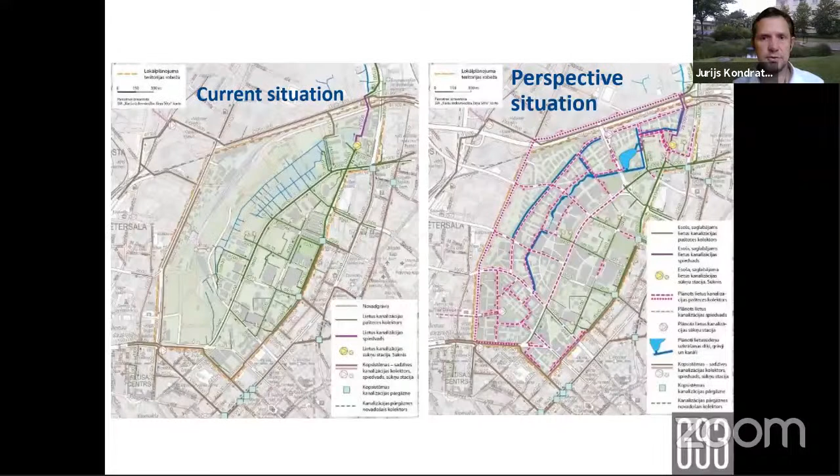Then after the feasibility study, there was a local plan for the site developed by the city, and within this local plan, this concept was sort of cemented.

And then there was, let's say, the landscape concept prepared for the whole area of the city, and this green and blue corridor concept was further developed and sort of blended with other landscape elements of the whole area.

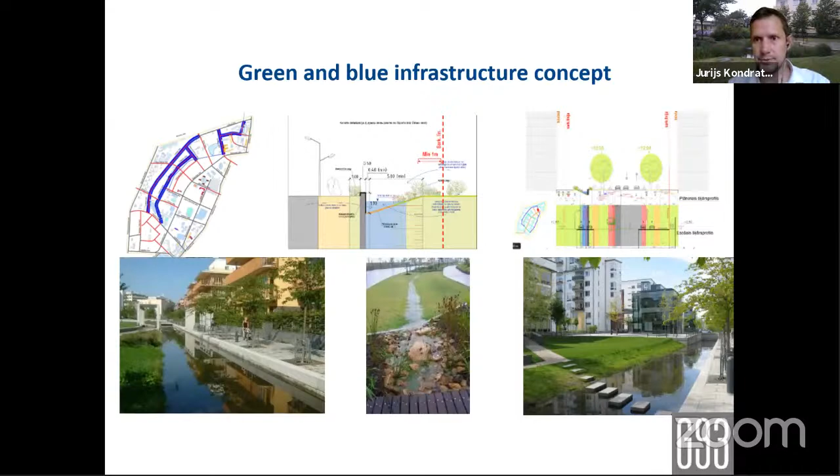So, and now then it was designed, and here is the technical design solution of this corridor. It's a cascade of swale and gabion canal and sort of park with a semi-wet, semi-dry river or creek, and then a park with a pond.

And you see some visualizations here. It looks nice, and the pictures are like what it could be in 20 years, because you see the trees are quite tall, and the trees are now being planted.

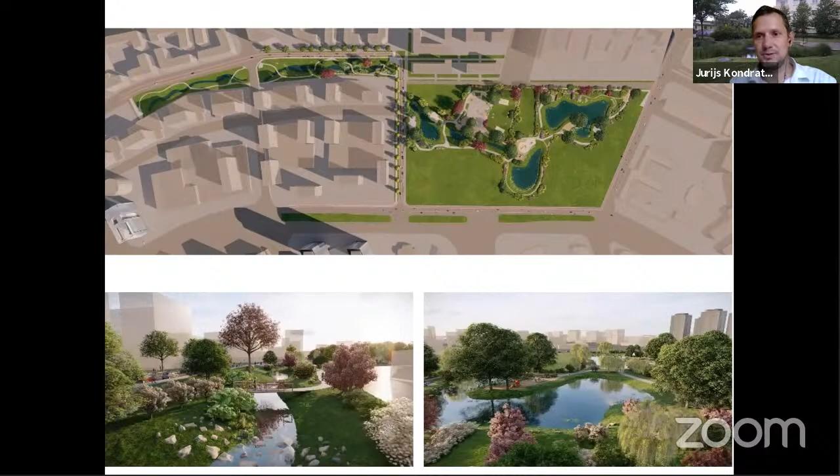And a good thing about that is that the use of dynamic hydrological modeling allowed us to understand variation of levels and to bring these different variations into the design concept. So you see the permanent level of the system, which is like around 1 meter above sea level, and when a big rain of 50 millimeters comes, you see the landscaped areas that are lower than others are flooded, but the network of footpaths makes it interesting still to observe and walk around and experience this flooded water.

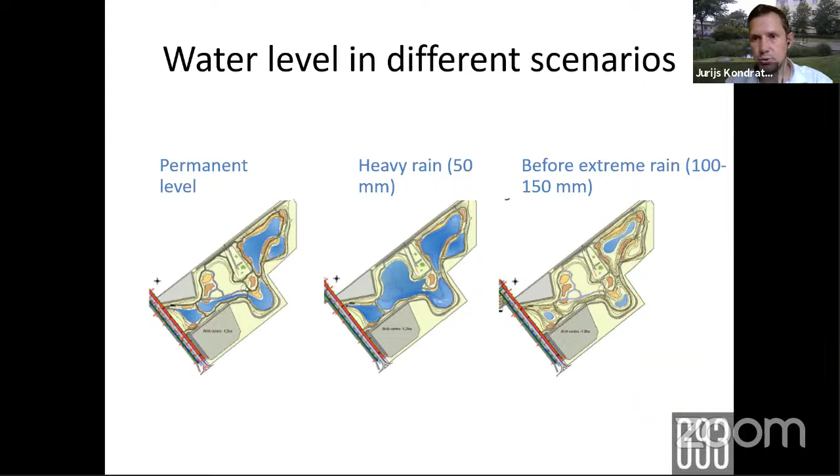So as I told you, we wouldn't be able to develop the system or model it without hydrologic and hydraulic modeling. Of course, it's yet to be seen how correct the modeling was, because it's now being built, but we will see soon.

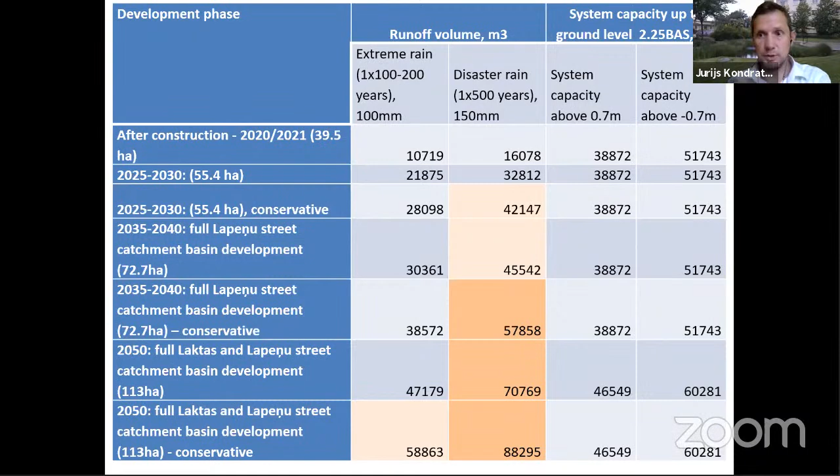Would be good anyway to keep the natural water balance. The visualizations look much better, but the good news is that it's been built. You see the pond part, to be completed in 2022, and hopefully it will take some years for grass to grow, for trees to grow, for plants to be established.

So I guess when this whole COVID nightmare ends, you're welcome to visit it. Hopefully it will be completely finished - I mean the pandemic - by the time when it's really enjoyable.

Okay, so that was for implemented and design projects, and now for some more general projects. May I ask how much more time I have? You have 10 minutes more. All right, great - it's very unusual for me to have 10 minutes more at this point.

Some projects that we did again - collectively, we in Latvia did. There was quite a good project, Riga Against Flood. It did some flood modeling for storms, for rainfall, as well as for sea and river waters.

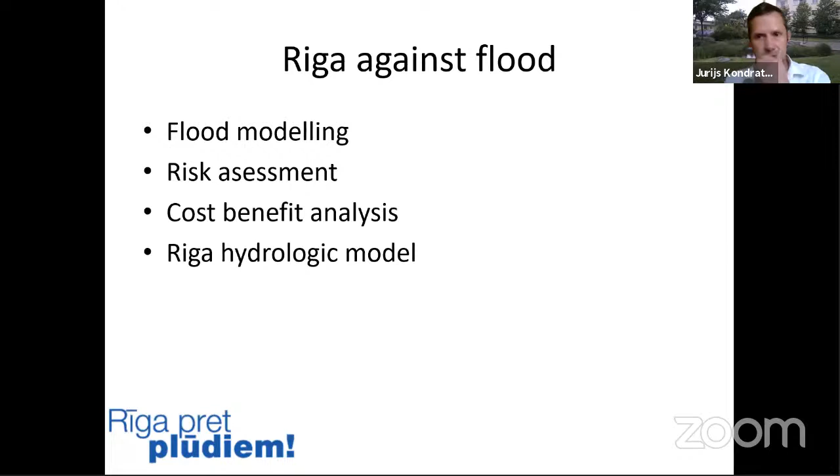I guess these are the main outcomes that are of interest to us. The biggest takeaway we have from that project are meteorological data, intensity, duration, frequency tables. Basically, these tables allow us to calculate the volume of runoff for different rain events.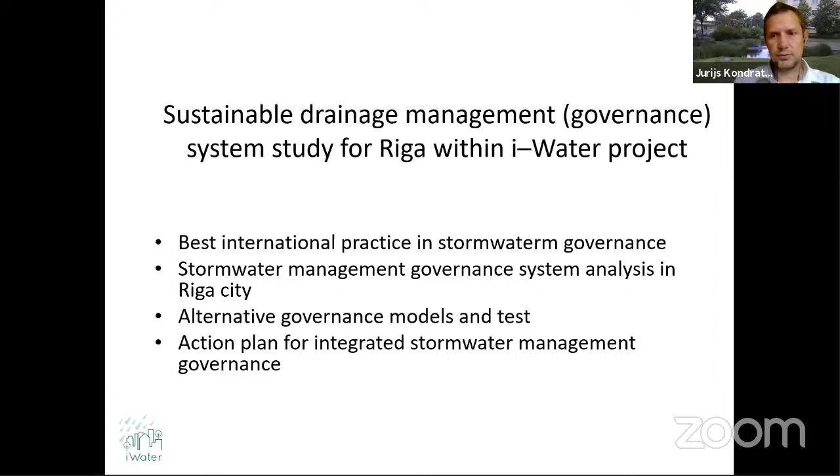There have been some other drainage basin or subcatchment planning projects of interest, where we attempted to prepare catchment management plans - to view the watershed in an integrated hydrological manner, and to develop centralized and decentralized solutions for stormwater management. One has been done in Riga, and one in Jelgava city.

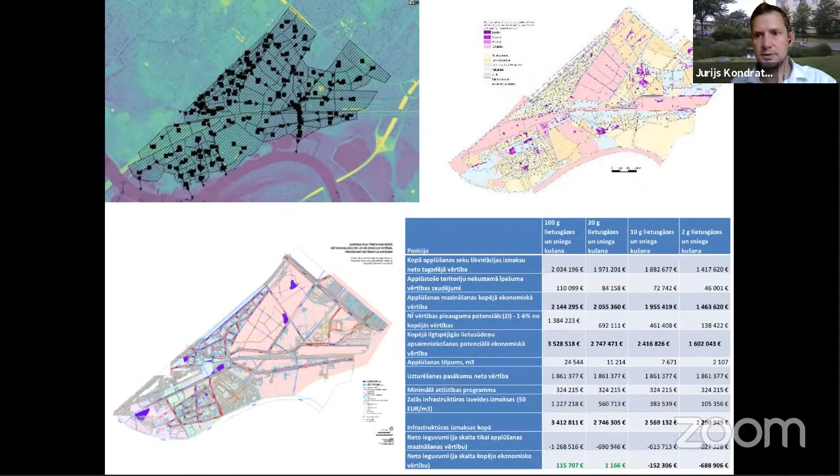A nice feature about this project is that we attempted to do some economic and financial analysis of flooding and of implementing green infrastructure. I think the takeaway was that if you invest only in flood risk management with simply engineering, hydro-engineering, gray infrastructure or traditional facilities, you may save some flooding damage. But if you do this in a way that is nice and attractive, you have a much greater benefit - this is something Ken mentioned - the benefit of improved public space that in turn increases property value. So this is a good thing to think about.

Also, just like the Finns in Helsinki and Estonians in Tartu implemented and adapted this green area factor tool, which comprises, or includes, sustainable stormwater management features.

So basically, now it's been implemented in Riga building regulations, meaning we have this mandatory requirement for green space, called free green area in cities. What this tool does is say that, for example, 10 square meters or 100 square meters of tree cover is much more valuable than 100 square meters of simply lawn. This tool compares different elements of green infrastructure given weights and factors, and calculates this green factor in the end.

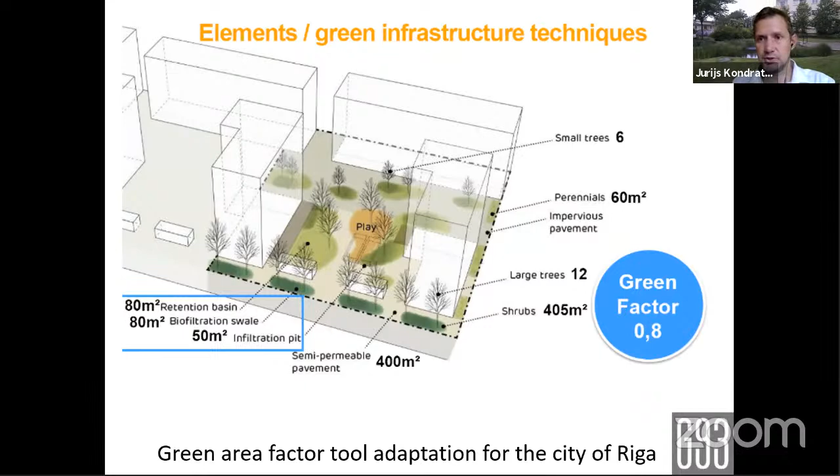So basically, you can have different options of different combinations of green infrastructure for the same site, and check the total value. Now Riga is implementing some elements of it into building regulations - for example, you can compensate some lawn area by a tree. So you can have less area but more dense green infrastructure, which is really good for development flexibility, keeping the provision of ecosystem services of the green infrastructure solutions. And we have adapted this tool for Riga.

Something we did some 3 years ago is the study of local legislation. We did a very thorough analysis, finding out what laws stand in the way of implementing green infrastructure for stormwater management, and we wrote down some solutions. Unfortunately, it's still on the shelf.

It's not been implemented in all respects. Some things have been changed, some are changing at the moment, but still there are a lot of things to do. Basically, our present legislation does not impede it — it lets us build green infrastructure, but it does not foster or stimulate it. So we have a lot of work there.

And here are some proposals and specific ways to include in the legislation that we proposed.

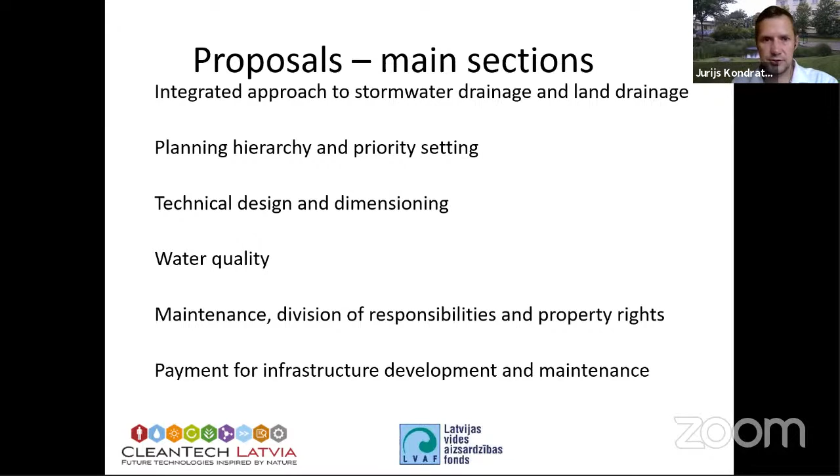The last project I want to mention — actually I was late for the seminar because I was in another seminar that spoke about this project. We are now preparing guidelines for municipalities, designers, and landscape architects for green infrastructure or SUDS, and it's in the final stage now. We will publish the end versions of the documents by the end of October.

What it consists of: basically we have published 3 documents. One is the academic study, a scientific literature review about the pollutants in stormwater from different land uses. We also studied the potential of different green infrastructure SUDS techniques for treatment of stormwater. It started out with this

skepticism of municipalities and developers saying, does this work? Okay, it looks nice, but does it clean the water? Does it treat the water? And basically, the conclusion is that yes, it does. It works as well as grey infrastructure, and maybe better in many respects.

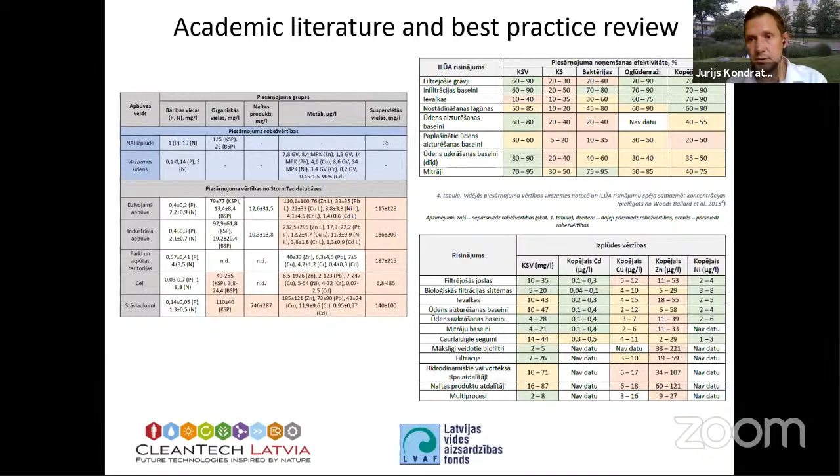So this was the first part, a theoretical framework for the next stages. In the next stages, we also summarized the Dutch, German, Swedish, Norwegian approach to stormwater treatment, because we have this traditional Soviet style of setting limit values for pollutants, and it really doesn't work with stormwater and green infrastructure, since water quality parameters vary across the rainfall, the seasons, and the places in the catchment. So a more modern approach is to regulate or suggest specific treatment options for specific land uses.

We summarized international experience and formulated a proposal for Latvian municipalities: we identified 4 stormwater classes — unpolluted, slightly polluted, more or less polluted, and polluted. We classified different land uses in different areas based on these 4 classes, and for each class we proposed stages of treatment, and then what green techniques could be used at the different stages. This is like a blueprint for municipalities, a template to take and implement in their binding regulations.

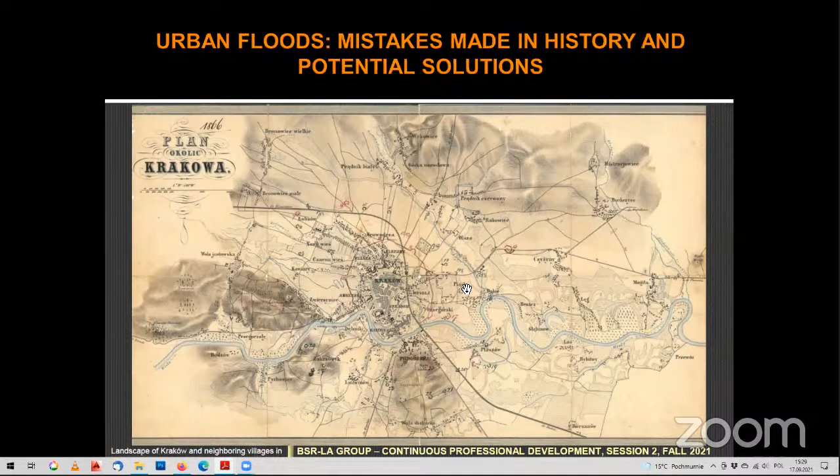The city of Kraków was established around the 10th century of our era, located here because of very attractive topographic reasons. There were several hills in this core center of Kraków, surrounded by swampy areas, supported by a number of streams and rivers which discharged into those swampy areas and through them to the Wisła River.

But when we look at the situation as it is these days - this is the original map of the city of Kraków from the mid-19th century - you can see what we have done. The situation looks exactly the same in many European and global cities: everything that has been wet, that has been natural, has been turned into living areas. We are lucky enough to retain many areas that have remained natural, the swamps.

After completing the embankments, many European cities decided that, well, okay, we are now safe against the floods, we can do a little bit more in terms of development - we are not so much prone to another flood event.

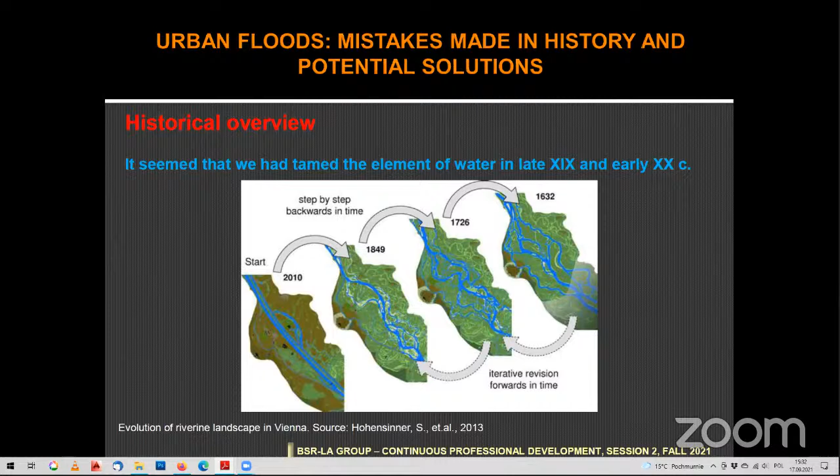After enforcing or embanking the major rivers, as I said, we started to get closer to riverbanks. We also started to block or cover the smaller creeks, treating them as not interesting, not an important element of urban infrastructure, not understanding their role, their importance in the urban landscape, in the well-being and health of the city.

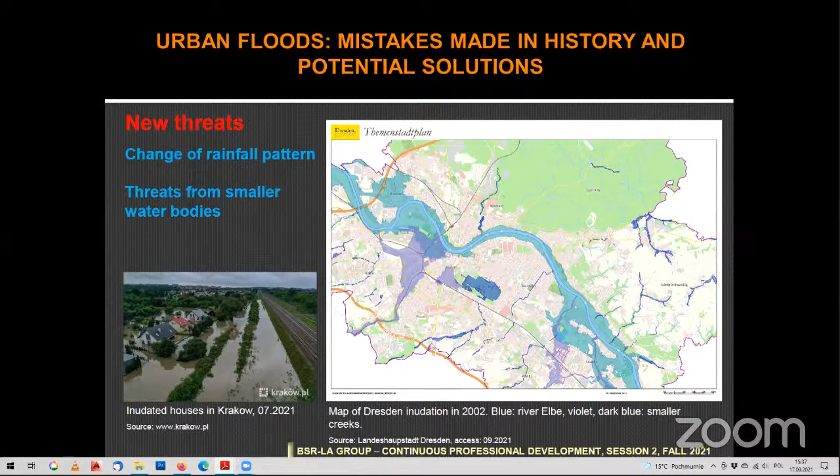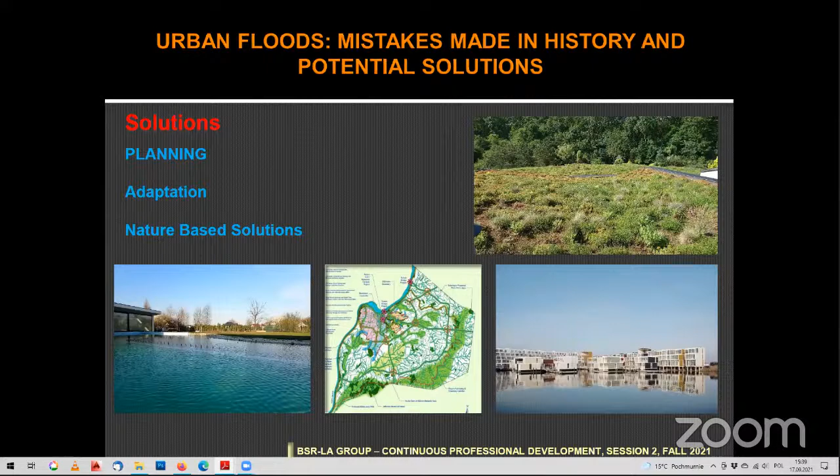So how can we cope with those threats coming from different sides in terms of urban flash floods? We should work on three layers or levels. As previous speakers have already mentioned, some solutions can be easily implemented in the cities. But let me explain a little bit closer those three levels of attitude, or coping, with urban floods.

The first and most important level is planning. As a major planning strategy, I take into consideration the green infrastructure philosophy, but not considered as a very narrow, localized solution for dealing with water or urban heat island, etc., but as a planning strategy that is implemented before development already occurs.

Treating the green infrastructure philosophy or strategy as a very broad intellectual concept, we should name as green infrastructure solutions only those implemented before development started, and as complementary resources for green infrastructure, those blue and green nature-based solutions that are implemented within our cities.

So those of you who remember one of my previous lectures from about a year ago, or who had a chance to read Benedict and McMahon's dictionary booklet on green infrastructure, should remember that there is a decalogue of rules, principles that are behind the philosophy of green infrastructure.

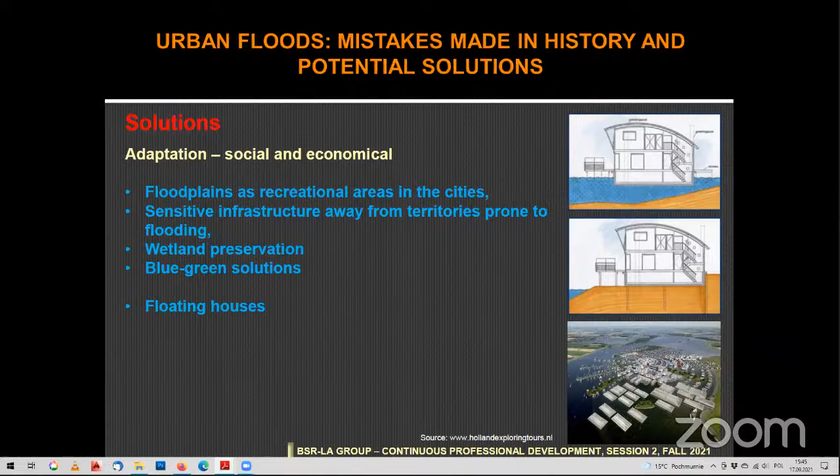Nature-based solutions - we also heard a lot about these proposals and solutions in previous lectures, starting from green roofs to reduce potential runoff from the roofs of buildings and houses. We may implement these nature-based solutions on existing houses through construction of rain gardens, including bioswales, retention ponds, and through the restoration of wetlands that have been drained or dried out in recent years.

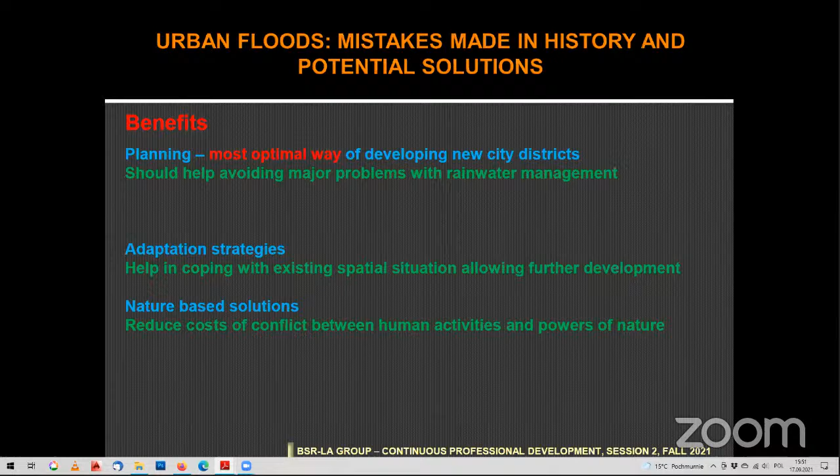To sum up, when we develop new cities and new urban districts, we should start at the planning stage, which is the most cost-effective and cheapest solution, though one of the most difficult when we engage in public discourse. Thank you for your attention.

Thank you, Przemysław, for your nice presentation. You very well rounded up all the discussion themes and made a sort of conclusion from all our presentations.